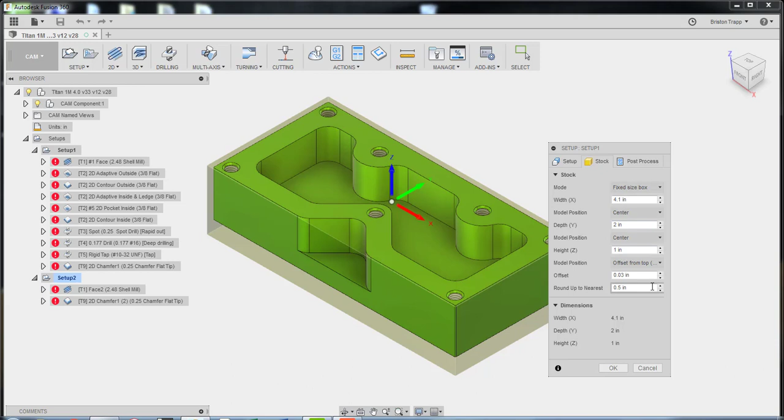Going to go over the feeds and speeds. I'm going to start with the setup folder, work coordinate system, top center. Stock is going to be 4.1 by 2 by 1 with an offset from the top in the Z direction of 30 thousandths. This allows our shell mill to do a little skim layer right on the top and allow for plenty of material on the bottom for our Mitee-Bite Talon grips.

Post process is going to be your program number with the program comment, and we're going to use 1 for our work coordinate system offset. First operation, facing: 3500 RPM, 80 inches a minute. You're going to turn the coolant to disabled, lead in, lead out 60 inches a minute, ramp and plunge 20.

Geometry, nothing there. Heights, default values are fine. Passes, pass extension 1.25 inches. Linking, all of those are fine. Next operation is going to be a 2D adaptive around the outside of the part. 6000 RPM, 126 inches a minute for a 7 thou feed per tooth. Lead in, lead out 100 inches a minute, ramp and plunge 30 for a feed per rev of 5 thousandths.

Geometry is the bottom outside edge. Heights, we're going to go model top 0.4, model top 0.2, model top 0. The bottom height is going to be our selected contours, negative 10 thousandths. It's going to put our end mill a little bit below our actual modeled part. Passes, 4 thousandths tolerance, 0.1 optimal load. Stock to leave is going to be 15 thou radial stock to leave. Linking, everything on this screen should be fine as default because we're entering from the outside of the stock.

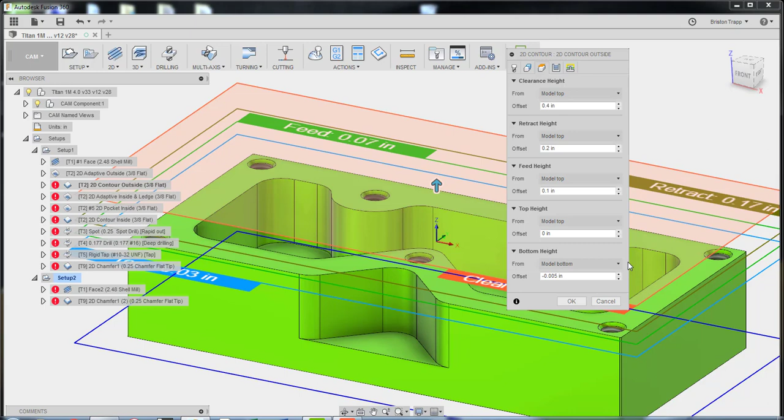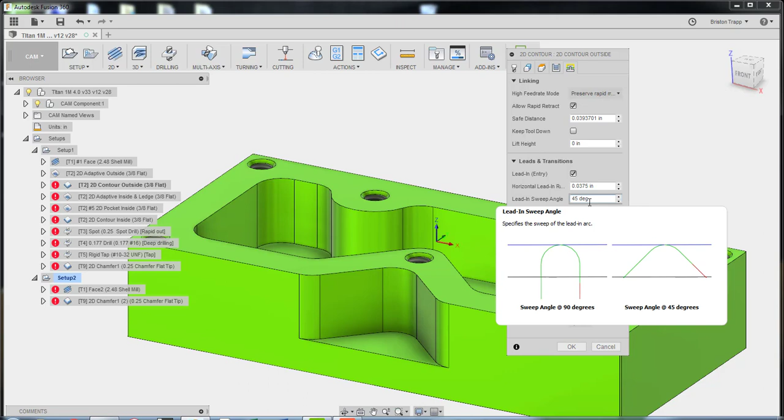Passes, you're going to change compensation type to in control for cutter comp. So in control, it's going to have a finish feed rate of 54 inches a minute. That should be fine as is. Linking, everything on here should be fine with our default values. Might want to change the lead in sweep angle from 90 to 45. And an entry point of right here, so we're starting in this front left corner. Click OK.

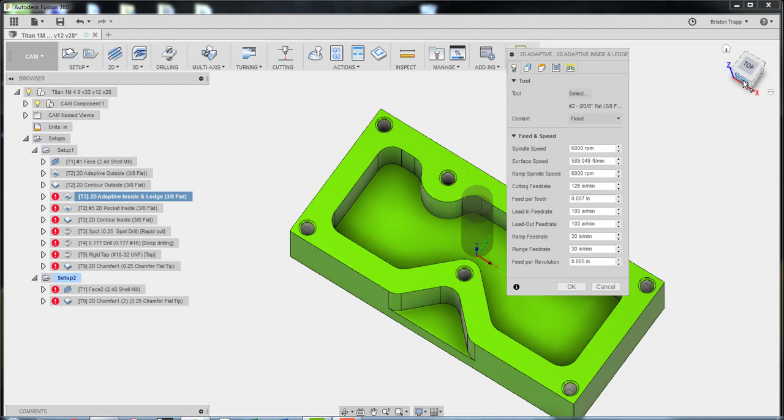Next operation is a 2D adaptive with our 3/8 end mill. Flood coolant on. 6000 RPM, 126 inches a minute, resulting in 7 thou feed per tooth. Lead in, lead out 100 inches a minute, and our ramp and plunge 30 inches a minute. Geometry, this bottom area and this bottom area. Heights, model top 0.4, model top 0.2, model top 0, selected contours 0. The default values will also work.

Passes, 4 thousandths tolerance, optimal load 0.1, minimum cutting radius 0.02, stock to leave 15 thou axial and radial. Linking, full retraction, most of these are going to be fine. Stay down level 70%, in on engagement feed rate 200. Helical ramp entry, 6 degrees for the angle and taper.

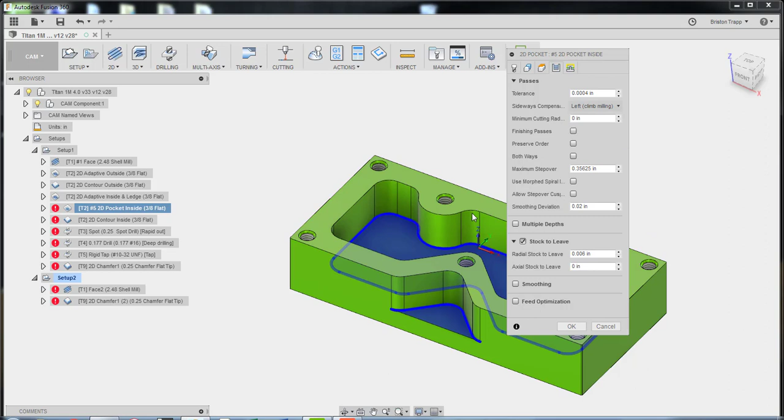Next, you'll have a 2D pocket, 6,000 RPM with the same 3/8 flat end mill, flood coolant. Going to go 54 inches a minute for 3 thou feed per tooth. Lead in 40, lead out 40, ramp 30, plunge 18. Bottom selections of the pocket, heights, standard, passes. The AM class you want to have no stock to leave. The PM class you want to leave a 6 thou radial stock to leave, so we're going to come back later and clean up the walls. Linking. Make sure it's plunge. Click OK.

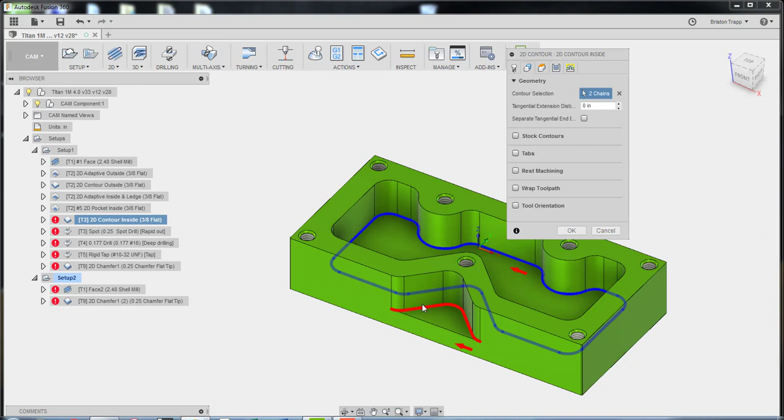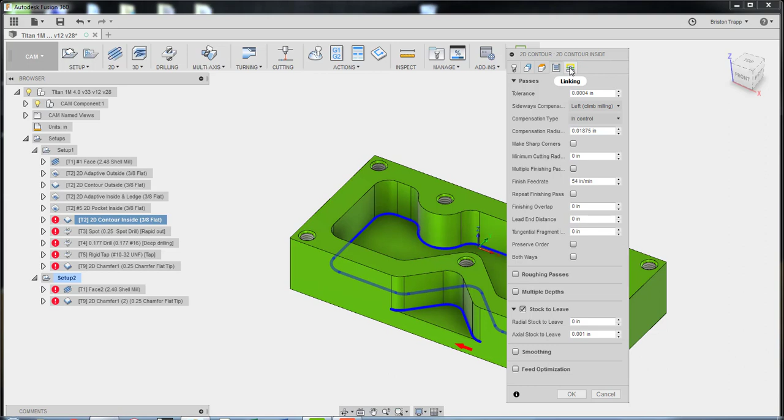The next operation is only for the PM class. It's going to be a 2D contour, 6,000 RPM, 3 thou feed per tooth, 54 inches a minute, plunge at 20, flood coolant. Geometry is going to be these two chains. Heights, that's fine. Passes, cutter compensation is going to be in control. Finish feed rate 54 inches a minute. Stock to leave is going to be 1 thou axial stock to leave to keep the end mill off the bottom of this floor as it's cutting the wall. Linking, this should be fine with the default values. Maybe 45 degrees. Doesn't matter that much.

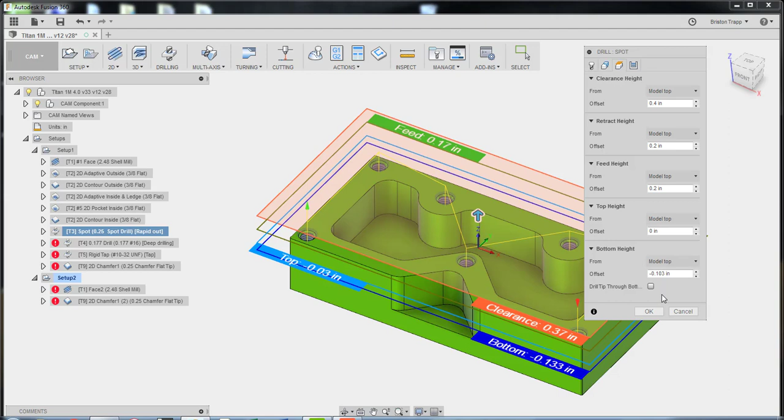Next operation, spot drilling. 1/4 inch 90-degree spot drill, 1500 RPM, plunging at 20 inches a minute, and we can actually disable our flood coolant on that. We don't really need it. So 1500 RPM, 20 inches a minute for the spot drill. Geometry is going to be your 7 selected hole faces. Heights, going to be model top 0.4, model top 0.2, model top 0.2, model top 0 for the top height, and the bottom height is going to be from model top offset negative 0.103. Cycle is going to be drilling rapid out.

Drilling operation with the 0.177 drill is going to be flood coolant, 3,000 RPM, 30 inches a minute for our plunge. Retract 40 inches a minute. Geometry, the hole faces, optimized order. Heights, clearance height, model top 0.4, retract height, model top 0.2.

Feed height, model top 0.2. Top height is going to be the model top. Bottom height is going to be from hole bottom offset negative 50 thousandths. Check drill tip through bottom. Cycle is going to be deep drilling full retract. Peck depth 200 thousandths and the minimum peck depth 200 thousandths. Click OK.

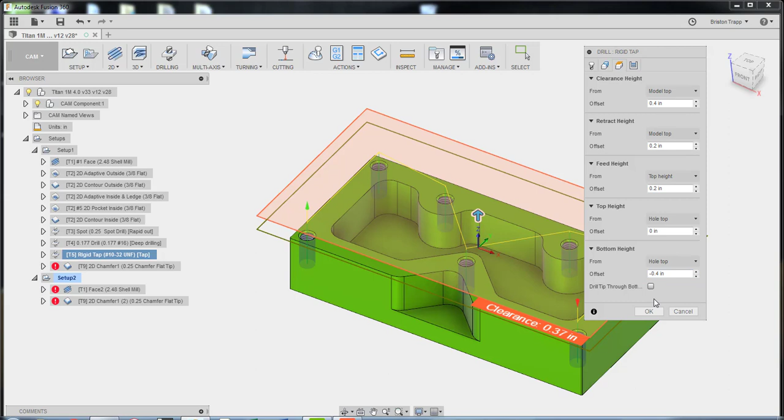Next operation, rigid tapping with the 10-32 form tap, flood coolant, 1,000 RPM. Geometry is going to be the 7 hole faces just like before. Heights are going to be all the same. Model top, model top, model top. 4, 2, 2. The top height is going to be measured from the top of the hole. And the bottom height is going to be measured from the top of the hole again and go negative 400 thousandths. Negative 0.4. The cycle type is going to be tapping.

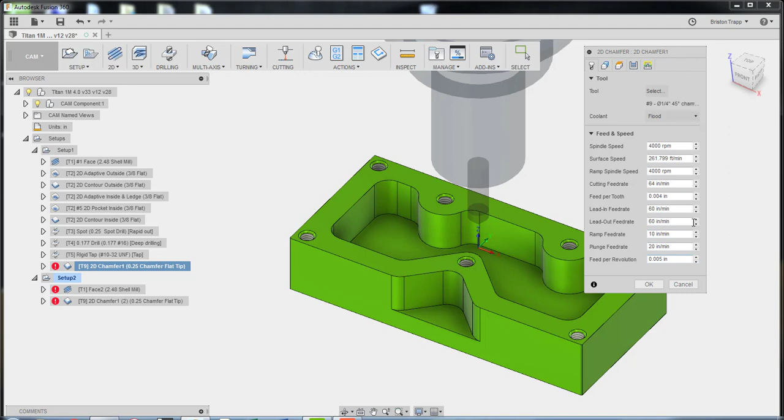Click OK. Final operation for setup 1 is going to be a chamfer. We're going to chamfer with flood coolant on with a 1/4 inch 45 degree chamfer mill. 4,000 RPM, 64 inches a minute, plunging at 20 inches a minute. Geometry is going to be our selected chains. Make sure the arrows are on the correct side. Heights are going to be the

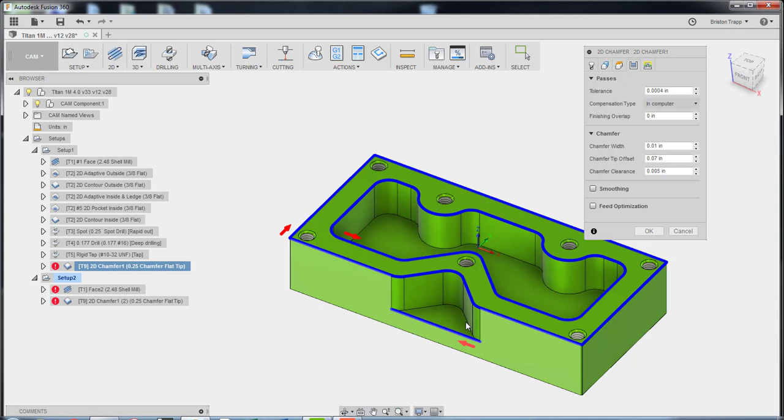standard for that. Passes. We're going to change our chamfer width to 0.01, chamfer tip offset 0.07, chamfer clearance 5 thousandths. Now make sure we get right in here without colliding with our part. Linking, everything on this should be fine as is.

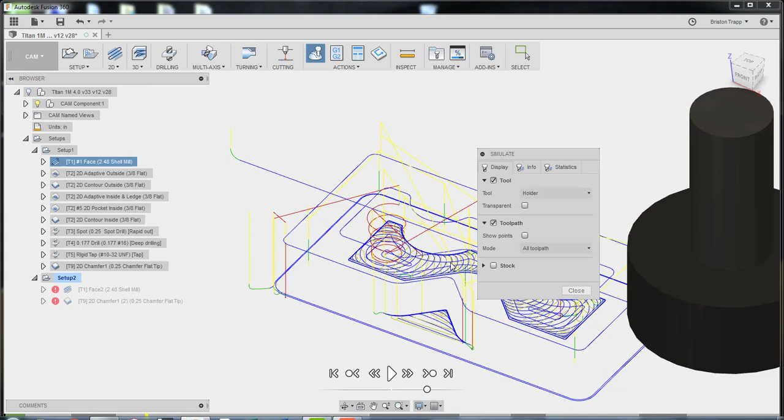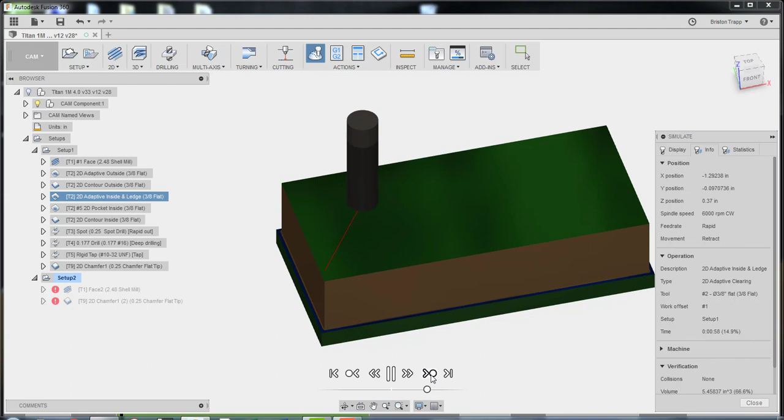Run your simulation, simulate, turn off your model visibility, turn on your stock, should look for tail toolpath. Skimming that first layer, 2D adaptive around the outside, finish pass around the outside. You can go to the info tab and you actually see the cutting feed rates. There's our adaptive, our pocket, finishing. Finishing the walls. Spot drill.

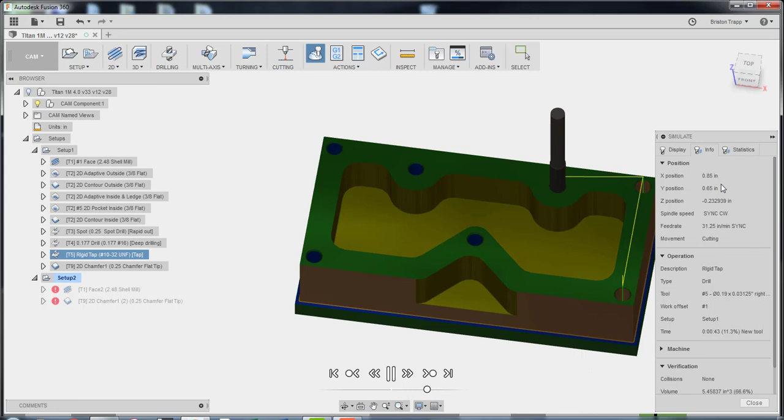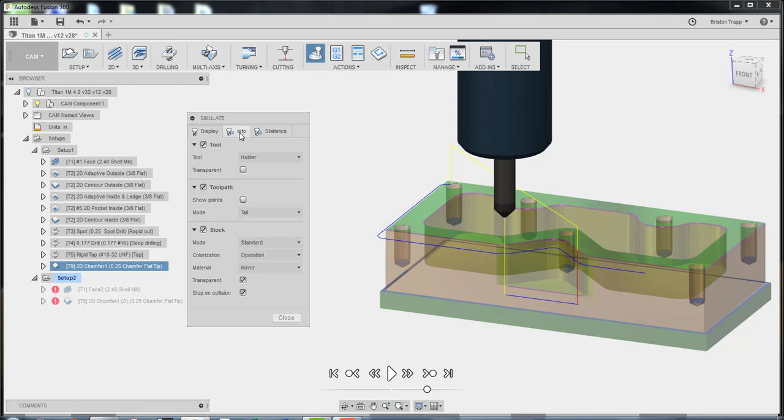Tap. And make sure you switch your stock to transparent so you can actually see that we have plenty of clearance for the tap. The drill needs to go deeper than the tap. And finishing with our 2D chamfer. Good idea to have stop on collisions. There shouldn't be any collisions with this part, especially if we have enough stick out right here with this 1/4 inch chamfer tool. That's the only spot where there would be a potential opportunity for a collision. Click close, turn your model back on. Remember to save your work.

And once you have created your setup sheet, as of right now for the standard mini mill, you're going to have your tool library with tool 1 being the shell mill, tool 2 3/8 flat end mill, tool 3 1/4 inch 90-degree spot drill, tool 4 is the 177 drill, tool 5 is the form tap, tool 9 is the 45-degree 1/4 inch chamfer.

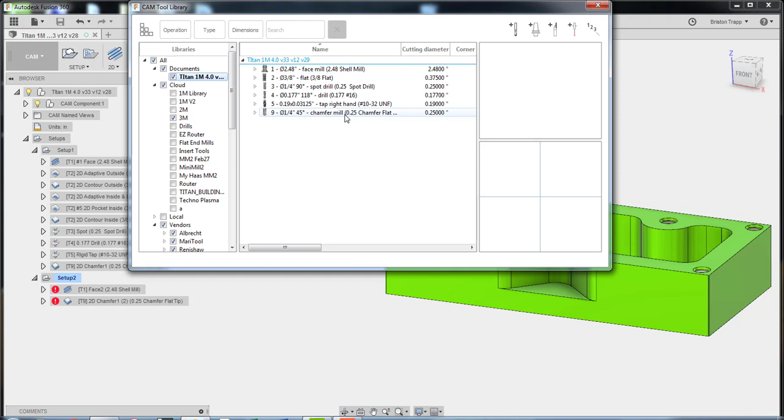To renumber your tools, simply right click on a tool, renumber tools, and then change this number. Right now it's 9. I'm going to change it to 99. Click OK. Let me go back and renumber that tool. 99 to 9. The Super Mini Mill has different tool numbers, same tool, just different numbers. Just check and make sure you have the right tools for the right mill.

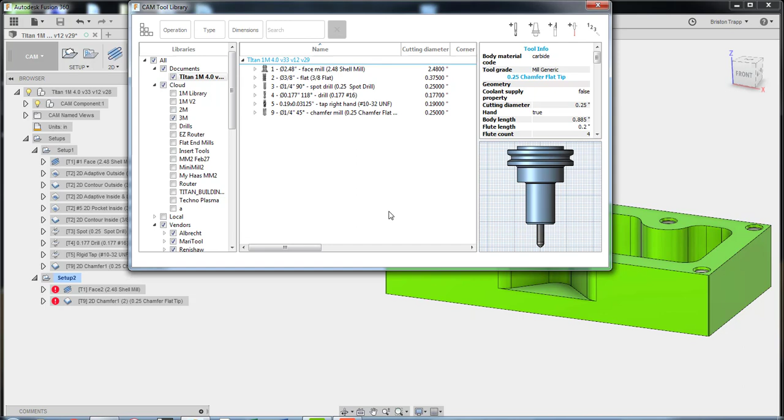Once you've completed your setup sheet and have had independent CAM verification by 2 other students, you're going to post-process. Make sure you post-process your entire setup. You're going to select the installed post library. You're going to go to the Haas pre-NGC, Haas pre-next generation control. For the standard mini mill, same stuff right here.

Down here, scroll down and turn on G187. So yes for G187. That will allow for a little smoother, faster roughing options. For the Super Mini Mill, you're going to have to find a different next generation controller. So we go setup. We need to go to the HSM post library. Oh, that's rude. This might have to be done at school in a separate video where you download the next generation post processor.

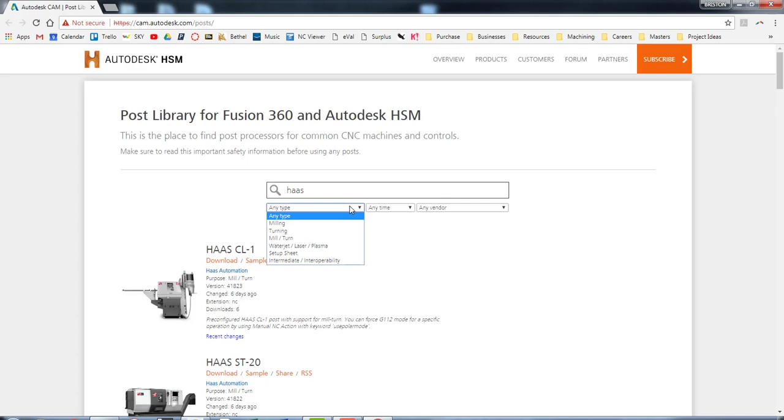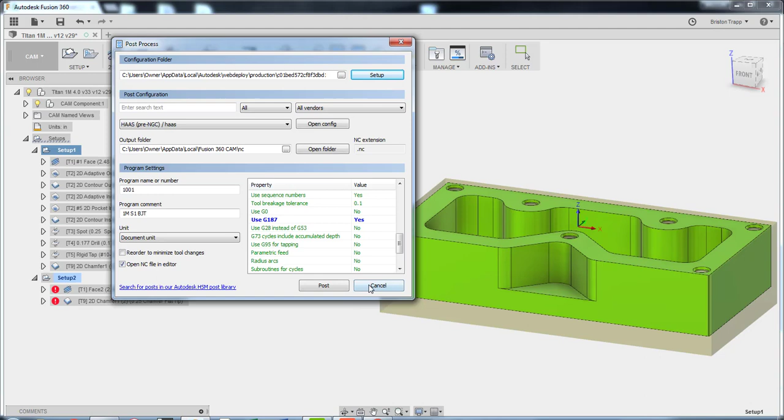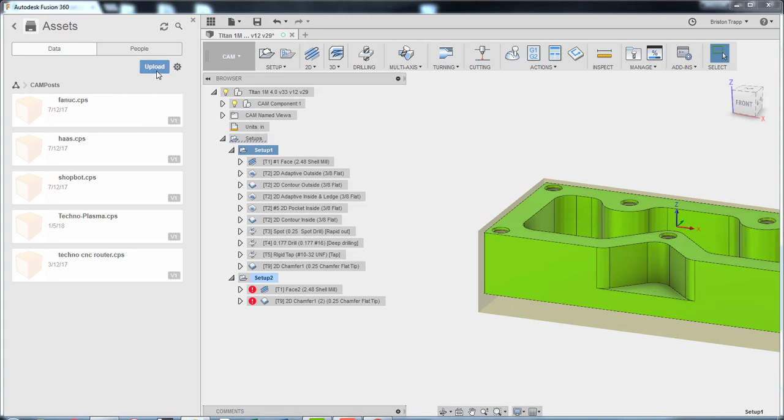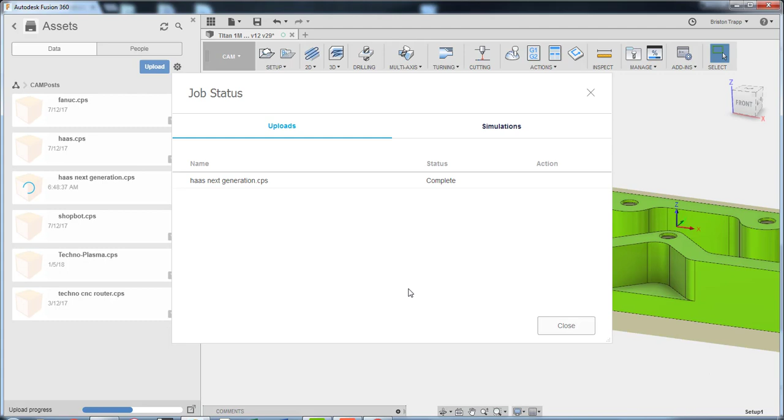You then need to go into your assets. CAM posts and upload, select file, downloads, Haas next generation .cps, open, upload, close, and now we can post process

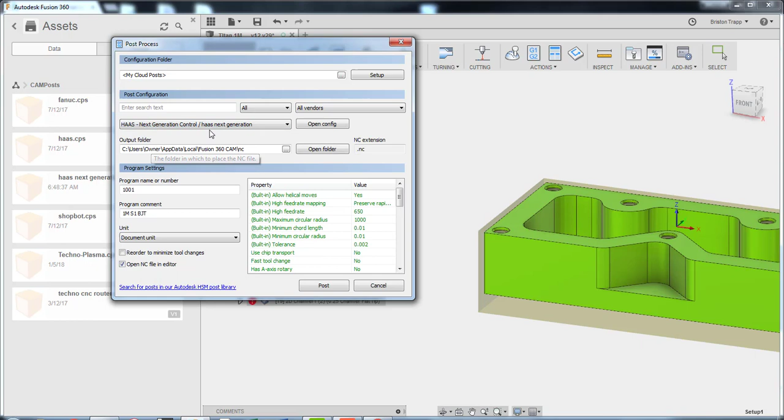with my cloud post. It should be Haas next generation control. The generic Haas is for the regular mini mill. The next gen control is for the super mini mill. But I need to do the generic one. Post. Save this on my desktop. You'll save it on your flash drive. You shouldn't see this window. It's the first time I post-processed on this computer.

And we now have our program with our G-code. We're going to do a quick little verification that we have our right tool numbers. Tool 1, face mill. Tool 2, flat end mill, 3/8 diameter. Tool 3, 1/4 inch spot drill. Tool 4, 177 drill. Tool 5, right hand tap. Tool 9, 45-degree chamfer mill. If you have your wrong tool numbers, you will crash.